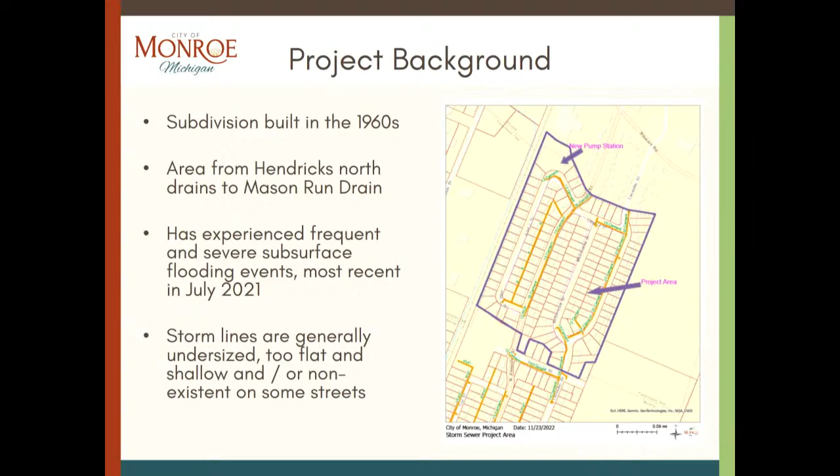The big whopper that got us started on this project, and I know it's been a long, slow grind here because we've had to do so much study, so much modeling, and secure the funding for this project, was the infamous September 11th, 2014, where we had something along the lines of 5.5 inches of rain in a very short period of time, and that was a very acute problem in this area. So those of you that have lived in your home since then, I'm sure remember that.

The issues with this project, of course, among many challenges we have, the storm sewer lines are undersized. In most cases, they're too flat, too shallow, and a couple of the streets there don't exist at all. John L., McCormick don't really have storm sewers. All they have is enough to drain the street, but there's no connections for homeowners to pipe their clear water

discharge pipes into it. And that's part of the problem, is that a lot of those homes, if they have them at all, they either have sump pumps going into the sanitary sewer, which is against code, or they have dry wells, French drains in the front or backyards, which kind of contribute to the problem. When you have rainwater, it fills those up, everybody's just kind of pumping in a circle.

So either you're pumping in a circle back to the sanitary sewer, which then causes those of you that have floor drains in your basements to back up because all that rainwater is getting in and the sanitaries can't handle it, or the groundwater is just high enough that it's continuing to put pressure on your foundation. So that's the project background and why we're here.

Some existing conditions, and I've shown you a couple of photographs in there which need a little bit of explanation, but I mentioned that the lay of the land goes to the south, whereas this subdivision is supposed to drain by the storm sewers into Mason Run. And the issue that's created is they're very shallow, and in fact, it was almost like it was an afterthought when the homes were built. The last run of storm sewer actually has 1 foot of backfall going back uphill.

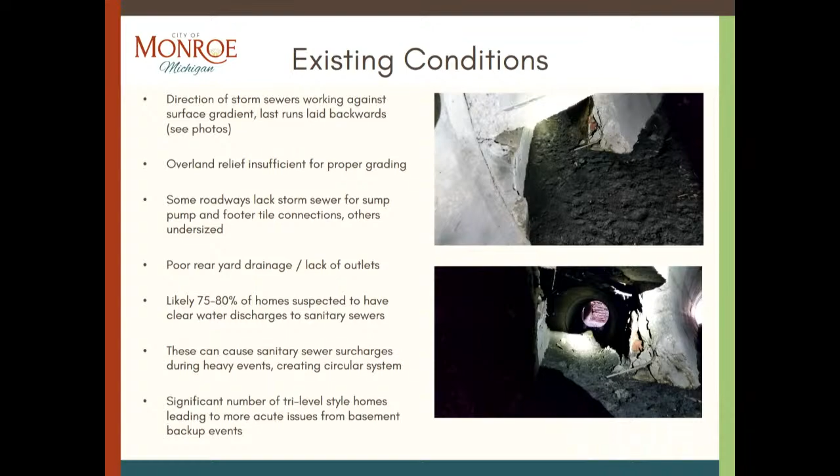So those, as I mentioned, can cause sanitary surcharges during those heavy events, and that creates that circular system where you think you're pumping it away from your basement and it just keeps coming back up the floor drain. And the other problem we have is, this was the vintage where we have a lot of tri-level homes, so of course, instead of this just being a basement problem for a lot of people, in some cases it's an actual bona fide living space problem. So we've almost got the perfect storm, so to speak, in this area. So we know this has been a big issue and a long time coming.

So what are we planning to do? Well, we've engaged the Spicer Group out of Dundee, and that's been our consulting firm, and they are, I'll say, sort of the premier firm around here that does stormwater hydraulic modeling.

The Drain Commissioner Office uses them a lot for their county drain projects, so we worked with them. Mr. Leroy has helped immensely with this project, as has our DPS staff. Our public services staff has worked on what we want to see here, crafting a project that we think will do the best job we possibly can.

So we're going to be holistically looking at this whole site. We're going to be upgrading the storm sewers, upgrading their size, upgrading their flow characteristics, adding branch lines, deepening the whole system for proper flows and maintenance efficiency. Right now, the drain is roughly 6 feet deep from the surrounding lay of the land. I mean, you can stand in there. There's maybe areas where it's 7, but

the south end of McCormick, near where it connects with Lavender, is like 3.5 feet above the flow line of Mason Run drain. So that tells you right there, how do you get water to flow properly from that area? So what that's leading us to is it's requiring a pump station. To deepen this properly, we need to basically lower everything, which is now going to put the eventual outlet below the drain. So that necessitates a pump station.

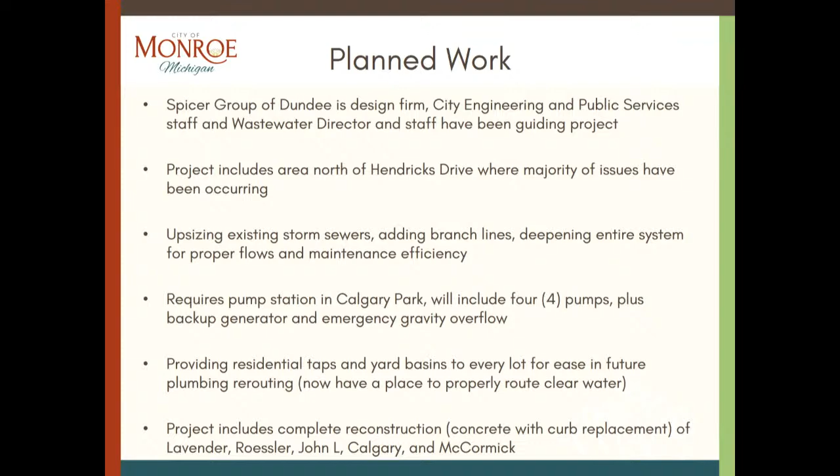So to give you some examples, the largest two storm sewers we have in this neighborhood right now are 24-inch diameters that outlet to Mason Run Drain at Lavender and Roessler. The primary outlet is now going to go down Calgary to Calgary Park, where the pump station will be located. That's a 42-inch diameter pipe. So we're getting some pretty big lines in here. Nothing's getting smaller. It's all getting either bigger or the same size.

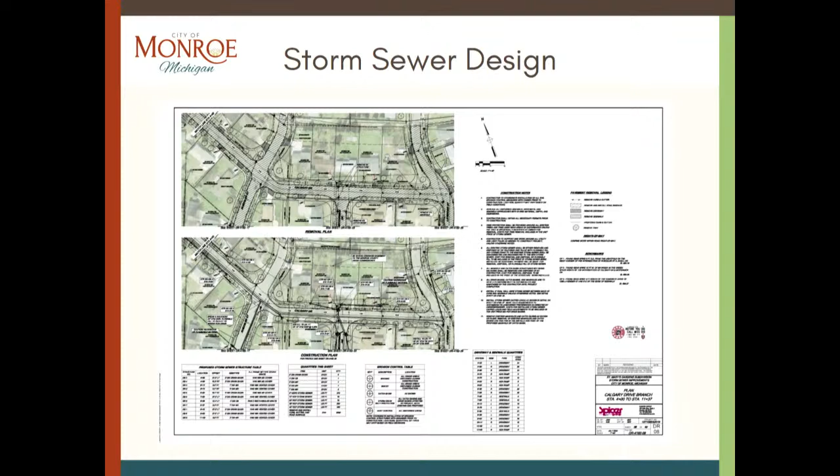But the primary route, McCormick, will be a main line. And then we're going to intercept the existing lines in a couple of cases. The Lavender Street main line won't necessarily be replaced because that's adequately sized, but we're going to intercept it and move it over to route along Calgary to the pump station. So I think the depth at the pump station is approaching 20 feet of that 42-inch line. That's opposed to the 6 or 7 feet that those storm sewers are now.

We're closer to 20. So this is the pump station design. I talked about that a few minutes ago. And you can see there's two larger circular chambers in there. Those are each a big wet well. I can't remember the diameter. I want to say it's 14 feet diameter and 20 feet in depth. And each one of those will have two pumps in them. And they'll join together in a splitter chamber, so it'll balance the flows.

And essentially, we're going to be running all four pumps more or less uniformly so we don't wear one of them out. And then there's a big trash rack ahead of that. So if for some reason somebody gets a tree branch in there, I don't know how, but a tree branch or log or something, it'll skim that out and pull those aside. It will be almost entirely below grade. And when I say below grade, it might stick up this far above the ground now.

The concrete slabs may be a little bit elevated, but we deliberately wanted to stay away from having a giant structure that you had to look at. So it's all below grade. The pumps are below grade. You'll see the natural gas generator. That's got to be above ground, but that won't be 3 or 4 feet high. You're not talking about something that's going to be big and obnoxious.

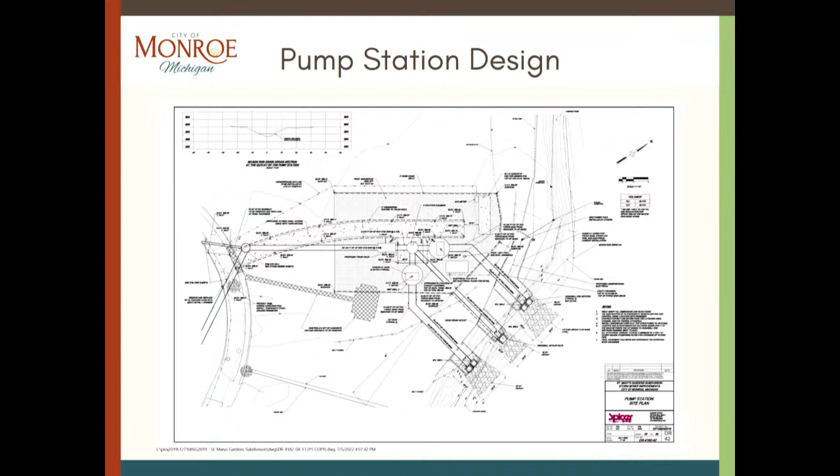So we did that deliberately, but that will occupy roughly half of the footprint of Calgary Park now. So there'll still be some vacant property to the west of there, and we've located this far enough from the home immediately to the east so that we're not within 20 or 30 feet of that home. So we tried to take those things into account the best we could.

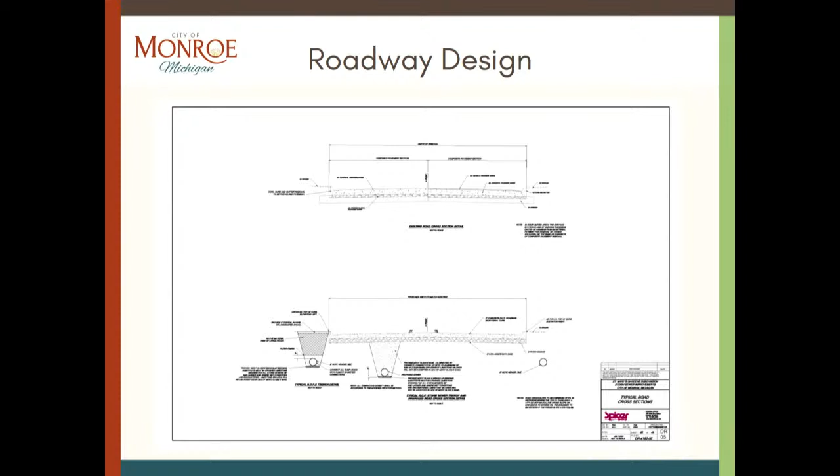If you look on the bottom of the two cross sections, there's two circular pipes off to the edges. Those are those header tiles that are going to go up into the properties. So those will be there to serve your properties. And those are generally 8 to 12-inch diameter because they're only serving 3 or 4 homes. So that's what our roadway design will look like.

So some of the things we wanted to stress, there's what this project will do, and then there's some things this project won't do. And we just want to be upfront and honest about the things that it won't do. But we think that what it will do will meet the vast majority of the needs and at least allow for solving the remaining issues. What it will do is construct an adequate storm sewer system for our current 10-year standards, which is adjusted for some of the more recent larger events.

Provide a pump station and backup generator with gravity overflow. And it will give each home convenient access to the new storm sewer in their front yard on the house side of the sidewalk for future connections. And when I say the house side, either under the sidewalk or just on the back side of the sidewalk.

And we're talking about little 2-foot diameter basins. We're not going to give you a giant cavern in your yard or anything. It'll be a 2-foot Nyloplast plastic, fairly shallow structure, which will have a metal lid on. So we'll have a lead tapped into those as well for each. Yes. So you have a lead up in your front yard. Yes. You'll locate those with the project.

Yeah, as Mr. Leroy indicated, each one of those has a contract price of 15 feet per lead. We're going to extend it to wherever you tell us. In other words, if we're out there installing this and we say, hey, homeowner, here's what we're doing. For those of you that are here, you'll know what we're doing. Here's the yard basin. It can go here, or we can put it 20 feet that way, or we put it 20 feet that way.

Those yard basins have a lot of room to move, and just because they're shown on the plans in one place, we did our best to locate them close to lot lines so that 2 lots could share one basin. But that's not to say that we're against adding 3 or 4 if we need to. We've already had one homeowner that said, that's not going to work for me. We'll probably end up adding a basin in there. But they're the smaller, shallow ones. We want to work with you to get these in decent locations for you. So where they're shown isn't necessarily set in stone.

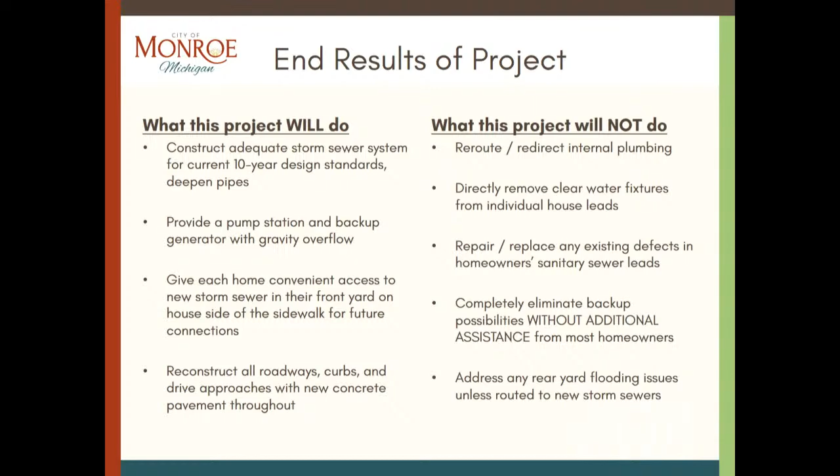Even if those yard basins are only 3 or 4 feet deep, it's relatively straightforward for you to run something as simple as a 6-inch corrugated tile with a sock on it to your backyard and put a little yard drain in, and that'll allow the water to get out to the front. But again, that's beyond the scope of this project. And you'll see why when I get to the cost structure on here. This is why this project has taken a while to get off the ground.

And the next number may seem a little high. It's $1 million in engineering. Some of that's already spent, but I mentioned the extensive modeling we had to do. We had to know where these lines need to be located. We needed to know where water was likely to back up to. So we spent about $350,000 in design, and that's the Spicer Group doing multiple iterations of this project.

We have about $650,000 on construction, which again seems like a large number, but we also had this bid with the number of days the contractor felt they needed. You're looking at over 200 days of construction, closer to 250. That's what they bid and assumed. And there's actually an offset in there where the contractor, if he exceeds that number of days, they have to pay the project back because we'll have extra inspection costs. So the nice part is we shouldn't have to worry about those inspection costs running over.

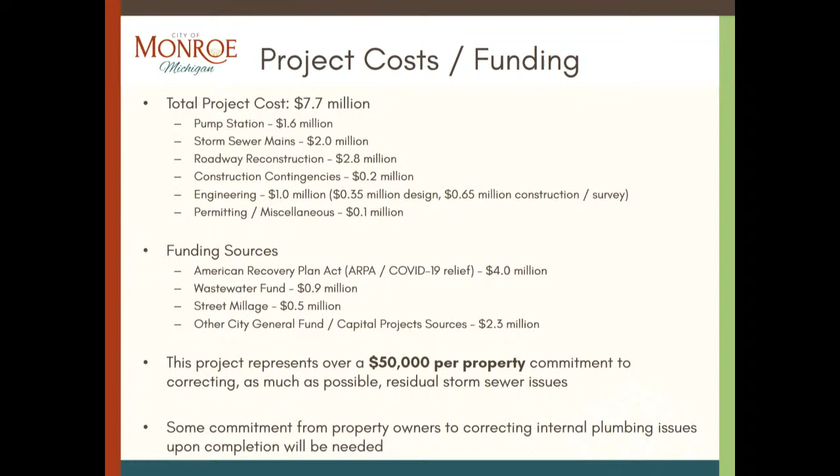And if you want to fix your rear yard drainage issues, that may involve some financial commitment from you to do that. But by and large, this project, we wanted to do it without a special assessment district because we recognize the deficiencies were there from original construction. So I just wanted to make that point.

I'm going to turn it over to Mr. Barry Leroy here, our utility director, and he'll step you through the corrective action plan because he has a few things he'll want to elaborate on. So, Barry? All right, how y'all doing?

Okay, so what's a corrective action plan? That is a designated plan over a time frame to address issues. The Department of EGLE with the state - we have a discharge permit at the wastewater plant that outlines all of our requirements for discharging water into the lake after we clarify it. This corrective action plan is in that latest permit, and we're currently operating under that.

And what we have in there is it's about a 10 to 12 year program to remove clear water in different parts of the system. And as Patrick pointed out, this St. Mary's Garden subdivision area is actually one of them. There's a variety of different areas throughout the system for us to remove, and this is the current phase we're actually in. We're actually getting ready to line some sewers out there in the Mason Run drain there.

So this program is also part of it, and we've had a footing drain disconnection program since 2015, and it's been 50-50, more or less, reimbursement to the homeowner for removing clear water. That includes offsetting costs for a sump pump being put in, getting the footing drains removed out of the sanitary, and putting in a backwater valve as an option.

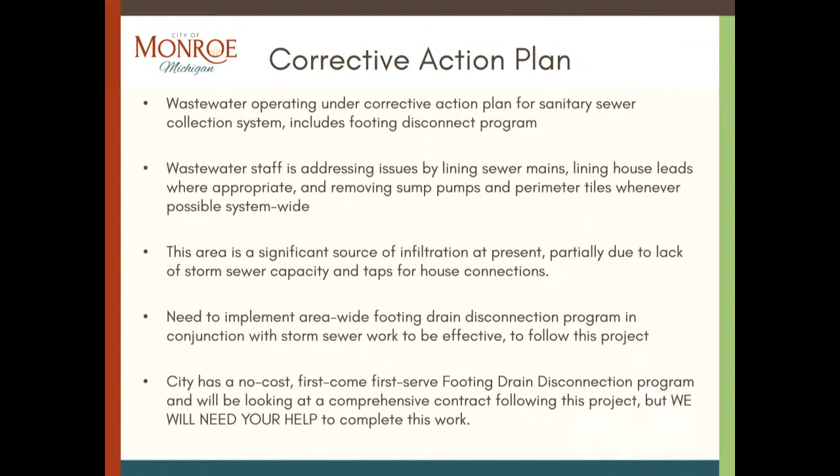So the next step that would be needed after the infrastructure is in place is to move into a footing drain disconnection program. Essentially, having the footing tiles tied into a sump pump that could be either on the inside or outside, depending on your situation, and then outletting that to the infrastructure that's put in with this project.

So that would be a big step. Another item on that program is to put in a backwater valve that can go either inside or outside, and that would provide additional protection from sewer backup. If the sewer system gets overloaded, that backwater valve would close and mitigate you getting backed up. And if your sump pump is tied in with all your footing drains connected, you'd be protected from clear water for a time frame.

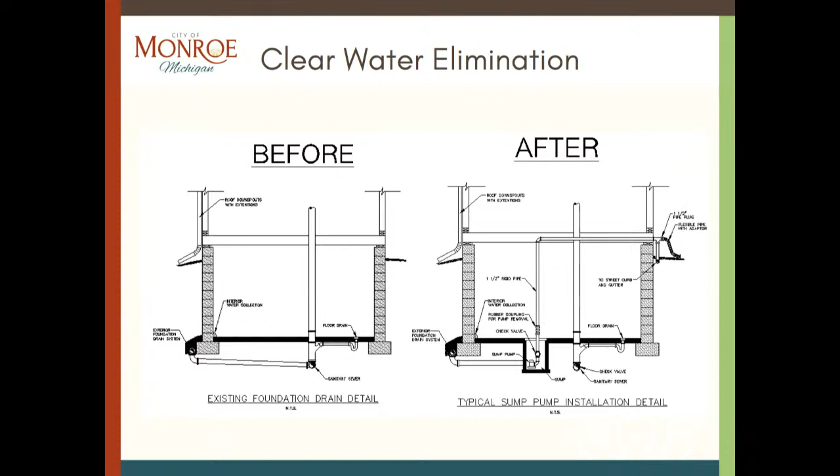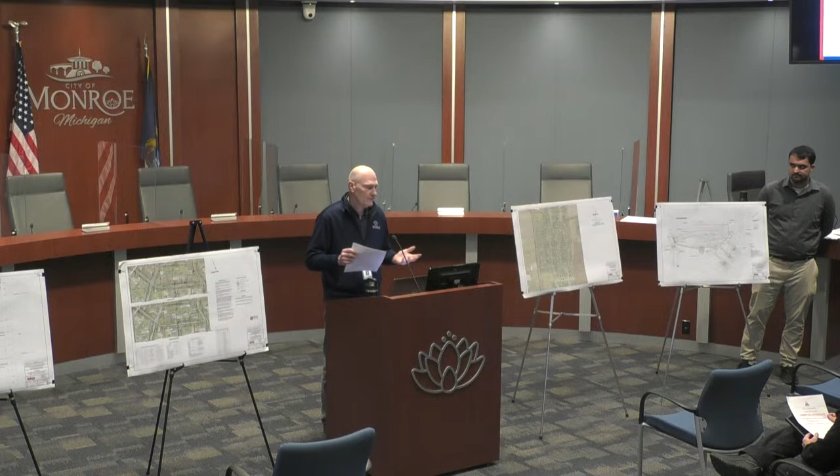This is a form we put together, and it's essentially 100% reimbursement, or we could have a city contractor do it. We just need to gain access to your home, evaluate it, and verify things from the inspections. Then, as the tail end of the project is finishing up, we would engage different contractors to either do a large project or a one-on-one type project to put in your sump pump. And if you wanted the backwater valve, we could put that in too. Then we would turn that infrastructure over to you to handle as a homeowner going forward. The whole goal here is to provide you the protection and get the clear water out. That's the benefit of the system here.

It's in our permit. We will be funding that through our annual rate structure, as well as Patrick. We pointed out the contribution, which is more of a capital fund investment, but the goal here is to do a comprehensive program tied in with their overall program.

So, with that, I'll turn it over to Pat for the next steps. All right. Yes, sir. Thank you, sir. Yep.

All right, so here's where we lay out what we know about the construction schedule, where we're going, with the understanding that Old Man Winter is approaching, so there's a little bit of uncertainty. You've probably already seen we're storing materials and bringing equipment in over at Calgary Park, which they're using primarily as a staging area.

Lead times are always a potential unknown here, because the funny thing is the longest lead time is actually the pump station, which normally would be the downstream end of this. A lot of the pump station equipment, pumps and the electrical equipment themselves, has the longest lead time.

However, the contractor will, once they sever any connections to the existing storm system, be pumping from that location into Mason Run Drain. They've committed to doing that. We told them, if you're going to start, you need to make accommodations to pump that stormwater out of there, so they'll be setting up some type of pump structure.

However, for the first few weeks, they'll be putting in new line that shouldn't affect the existing system. They're going to start at the pump station location where the wet well will be, and start running that large diameter 42-inch pipe. They'll head on to Calgary and then start heading east with that. They usually lay the pipe from downstream to upstream, and they are likely to start doing that.

So don't worry about the winter work. It may be slow, it may be tedious, but it won't impact much of your existing house system early on. Assuming we have a decent winter like normal where they can get construction done, we'll probably start working on those branch lines sometime in the spring.

Hopefully by then we'll also have the wet wells in so we can start installing those. The wet wells may be in a couple of months. When I say wet wells, that's the pump station, those big chambers. They'll store a heck of a lot of storm water, so even running one pump, the water will get to those wet wells and we'll pump from there. The pump station construction will be whenever we get the materials in, so hopefully sooner rather than later, but we don't have a delivery date yet.

We believe, based on the contractor schedule, their completion date is September 30th of 23. We believe they'll try to beat that as long as everything's in, and there's no reason they can't. But the street construction work probably won't begin in earnest until May or June.

That's where you'll have some restrictions on driveway access. We are not going to tear out every single street simultaneously and then pave them. It'll be somewhat inconvenient because if we're doing five streets at a time, we've got staging, and some will be one way going one direction, but there will always be a path through the neighborhood from north and south, whether that's Lavender or Rosler. We'll do half and half: John L. and Rosler will go together, McCormick and Lavender will go together, and Calgary will get pieced in wherever appropriate.

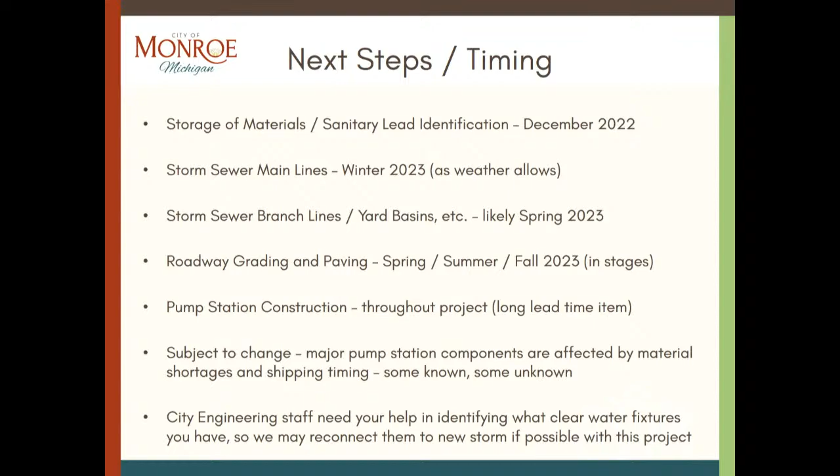Any questions? We're going to have, and again, Chris's contact information is there, he has some business cards. I think what I'd like to do, since we are broadcasting this for later presentation to others, is see if there are any general questions on the project itself, and then we can adjourn the public portion of the meeting and talk about any individual concerns you might have on your properties. Are there any general concerns?